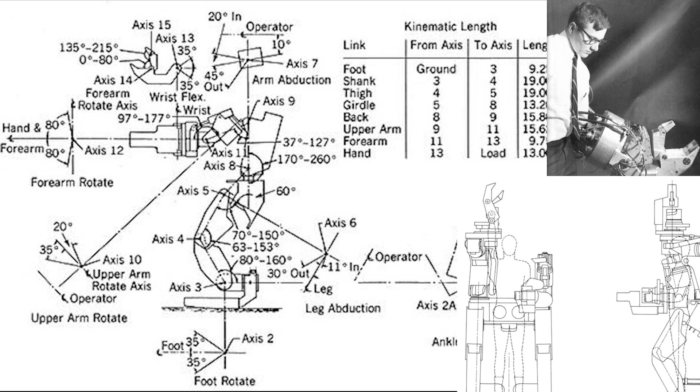I have been away at an event to do with exoskeletons in Washington DC. This was ErgoX 2023, where I was with people like Bill from the Exoskeleton Chats, through to the head of the HFES, Chris Reid. It was all about exoskeletons and the human factor side. It's been quite the adventure, really insightful, meeting people who are also interested in finding Hardiman and figuring out what happened to it.

Let's get right back to the mission at hand. It's now official, there is a date. The 7th of December is when we will be unveiling the build of what we've actually been working on here. This is for an event I'm doing at UCLan. I'm doing it hybrid, so I'll be giving a public talk about exoskeletons and having some guest speakers interfacing across the pond. It's all really exciting. This channel is going to change a little bit, because we're now going to have a report each week about where we're up to with development on the actual project, where it's going, and whether we're ready for the event. Starting from today, the 28th of the 10th, we're going to be counting down right through to the 7th of the 12th, which is when the event will occur.

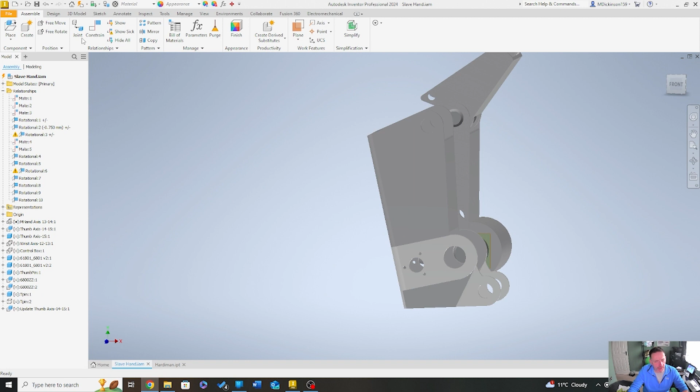However, what we then did is I went back and changed it. Let's just hide you out. I changed the original one to match the actual one that we've now proposed to be correct. This was purely because, if we have a quick reminder on Mosher's image here, you can see there is a 3-pinned plate here which binds into the back, which I believe to be for the actuator, for the hydraulic actuator. So without further ado, it's time to make a couple of changes, get this swapped out and put the right one in.

So I'm just going to bring the hand back, and we're going to get rid of that. Let's get you, and sadly hit delete. Watch the whole system go, well, what have you done, you've broken stuff. So let's put you there. Are you still in? Oh, you're still good.

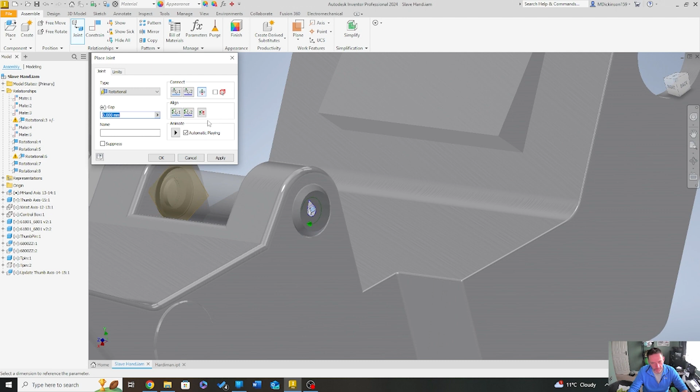So let's get a joint. We've done this so many times now, I can move relatively quick. So joint you... oh, hang on, I'll joint you to you. Yes, spin that round, there we go. And then apply. Oh yeah, let's just add that to the relationship.

Same again, let's do a joint, let's go you to you. However, I'm going to apply a gap here of 0.5 millimeters. Make sure that's right, it's going the wrong way, so minus 0.5. Perfect, so I'll go apply, add to relationship.

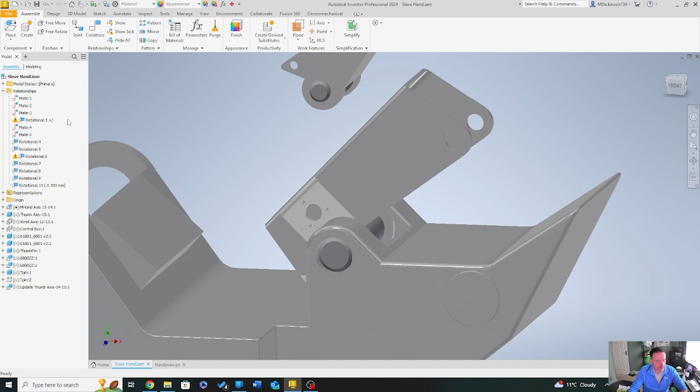It's just because there's been changes and the system's like, oh no, what are you doing to me? So on this one here to this here, I've lost some of my restriction we had on it. I do actually have to build that back in, which is a pain in the backside. So anyone that's erroring now, really I've got to delete it, and delete that as well, or else it's going to start not playing ball.

So what I'm going to do is just get things into position, and let's do the same again. I'm going to go joint, of you, and I'd like to place you onto here. Snap that into spot like that. Apply. Okay, and oh, the other one hidden, I'll get to that in just a moment.

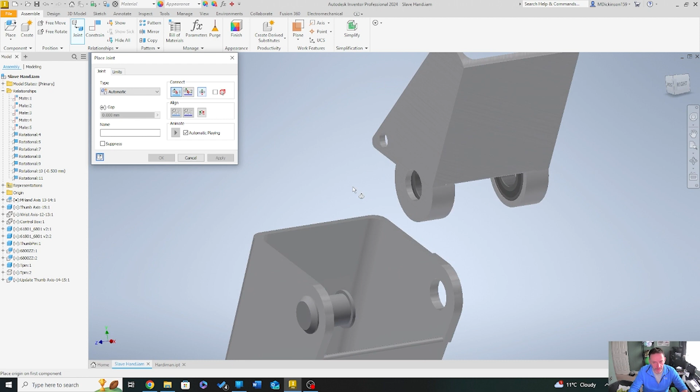So I'm going to say I want this joint and this area to be snapped. And then, as ever, it'll ask, is that what you want? Of course it is. So I'll go 0.5, because I think 0.5 is what we chose, probably about 0.75 looking at these, but whatever. So I'll click something like that.

A couple of bits we need to fix. It's not a major issue, but there is stuff we need to fix. So let's bring that round, snap you around to there, and we're at something like that.

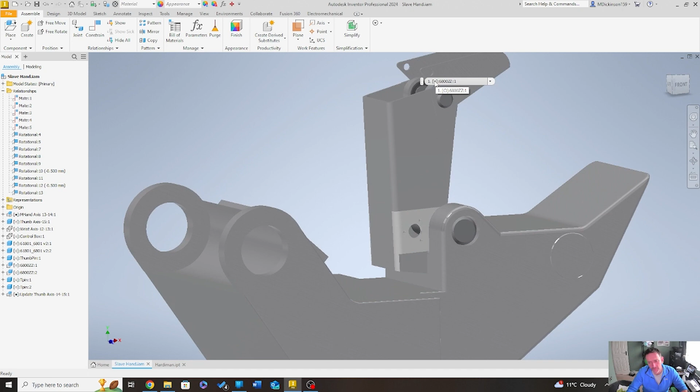So what we've now got is, if we have to take a dive down deep here, we've got the actual pinpoint. These pinpoints here, I am 99.9% sure there is a linkage here. If I was building this and I was in the 60s, I would probably try and have an interlinkage here, but just the way that this is put together tells me that they probably didn't, which I'm not criticizing, but...

I don't know, I'm not convinced with that. I'd have really done it so that it was an interlinkage, because do you really want to be able to independently control the tip? Just the tip? That's a joke, but never mind.

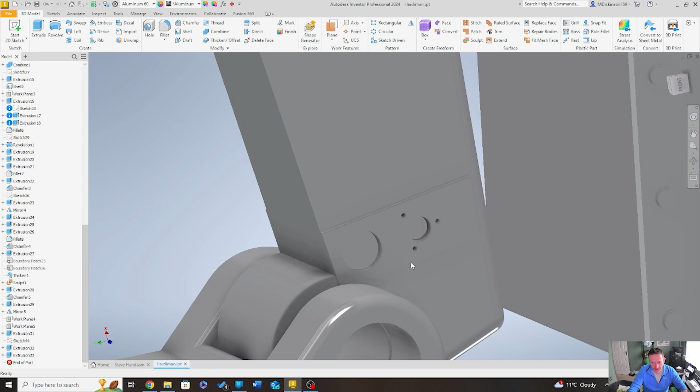Anyway, okay, so let's get back to it. I'm going to flip this back around to the Hardiman itself. Now you see now that really our initial design here has now died a death, because this is how I'd originally designed it in, and that is how it actually has gone.

Now, to just rest assured on your faith in me, let me just come back, push this to here, let's bring this back to Mosher. And you can see there, that's where that plate is sitting. To be realistic, it looks like there is a countersink sitting there, which I can add in anyway, so I'm not too fussed with that.

Okay, so we're that little bit step closer now. Now, next thing we need to consider, just zoom it in. Look here, look to the lower end. That section there is cut out. One thing we know for sure is the whole thing, lower arm here, is hollow.

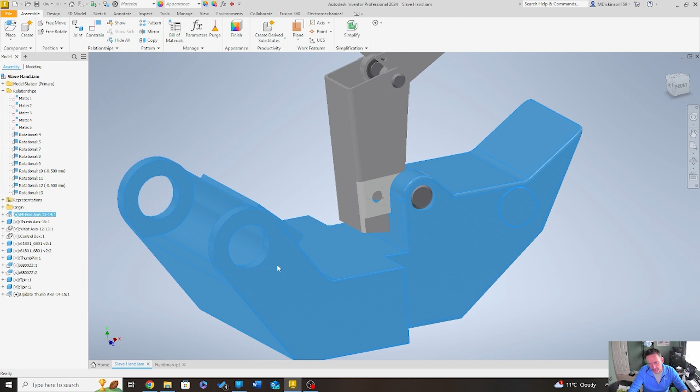If that to be the case, that means I'm going to open this up, flip you right round, and then let's take a look at this being hollow. So we've got chamfer, what's it, chamfered there? That's chamfered on the outside.

I'm just going to suppress that because I don't think that's a feature that's needed. And we're going to thicken there, suppress you as well. I don't think that's needed, but we'll leave it. That was from the counter things that we were doing.

Okay, so what I'm going to do is presume that there's, I'm going to go 3 millimeters. That is me guessing. They wouldn't have wanted this thing to weigh a ton. You know, we kind of sit there and go, why have we got 6 bodies?

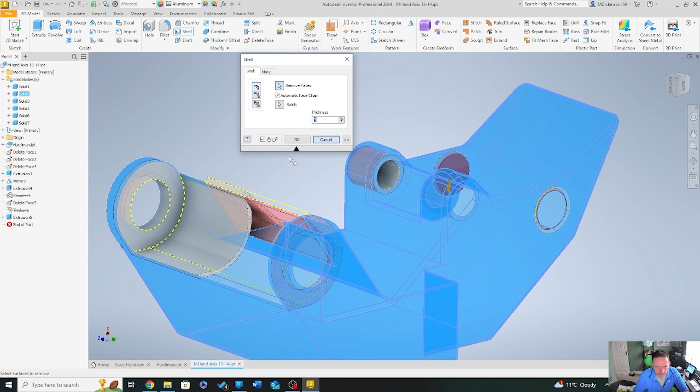Okay, let's try this one more. There's a shelled section there, and okay, so...

I see an error here. That makes me wonder, is that what's causing the problem? So if that's the case, what I'm going to do is quickly make some modifications, chop that out, because I am actually going to have to chop that out anyway, because I realised something on the construction that needs to be thought about.

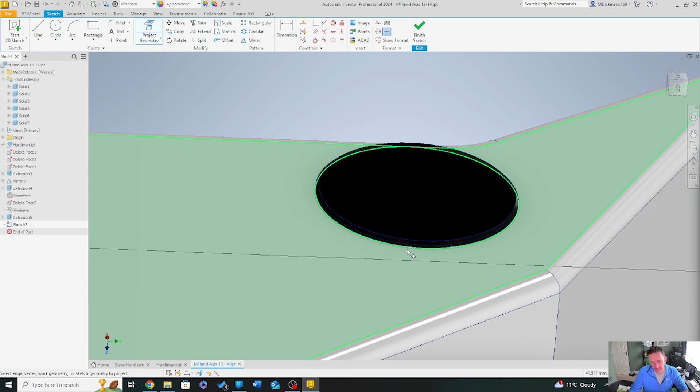But I think shelling something like this is a bit of a pain in the backside, which, you know, any system like that, it's not an Inventor thing, it's just any system. When you do something which is kind of crazy in the values, the system is not always happy.

So what I'm going to do here is I'm going to use the same sketch to do it on both. Great tool this, I love this. So profile, I've got my profile set. Where am I taking it from? Here. And I'm going to flip my direction, turn it to a cut, and bang. So now what I've got is a shared sketch between 2 profiles.

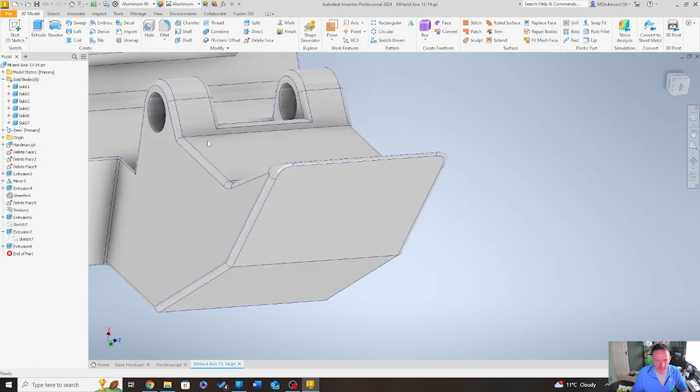Great tool, love it. I think that is one of the first things that are causing problems, and probably that. So what I'll see if I can do is, just an experiment, I'm probably going to cut off this section here and see if that will shell, because I don't see why the rest of this wouldn't shell on a 3mm rad.

I see an error there. I've got an error marker there. I wonder what that was from. Let's just come back. Let's go shell. We'll go solid U.

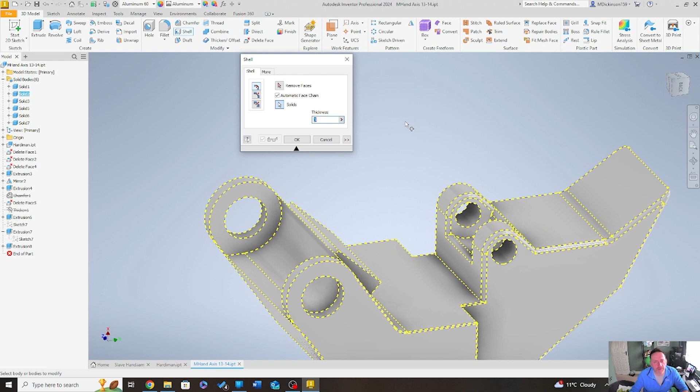Let's see if that gives me any joy. Come on, come on, come on. I think it's this back end. Oh, hello. Okay, so let's just have a quick look.

It appears that my suspicions could have been correct, which is often nice to be correct. Let's get a section in here. Pop you right out to there, and there we go. Perfect, so we've now got our shell section. It's all nicely into position.

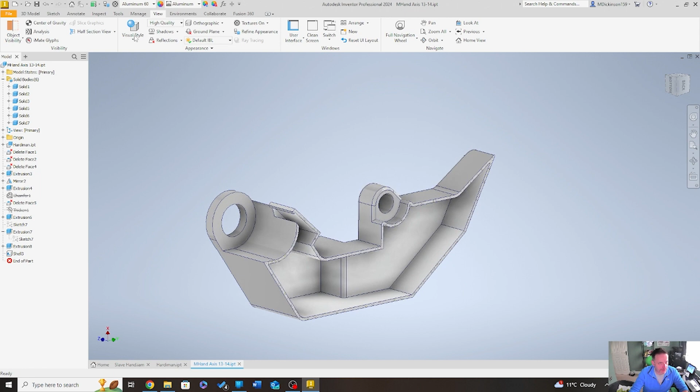Now what we need to do - this was coming just because of that small interruption which was coming from the locator pin that I'd put in. So I'm going to delete that out. I'm going to come in from my midsection here across and cut directly down.

Wait a second, let's have a quick look. See there where the rivet comes in, and where over the chamfer sits, that's what they've cut back. So I'm going to go mid direction here, and then it goes right up to the midpoint of where that anchor sits, so here. So I'm going to cut that right back.

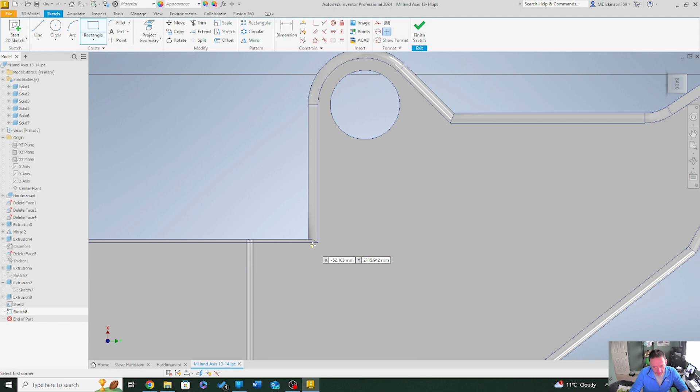So here we go, let's see if this works, because if this works, it's so exciting, isn't it? So let's go here, go right plane, and then let's do a quick sketch. I'm going to bring in my corner rectangles, snap to you, and then over to you like that.

Okay, and then like magic, we get the thing into position. Rather than you guys having to sit there watching me do millions and millions of sketches, I am just pausing a few things out to make life so much quicker. So let me quickly bring this back.

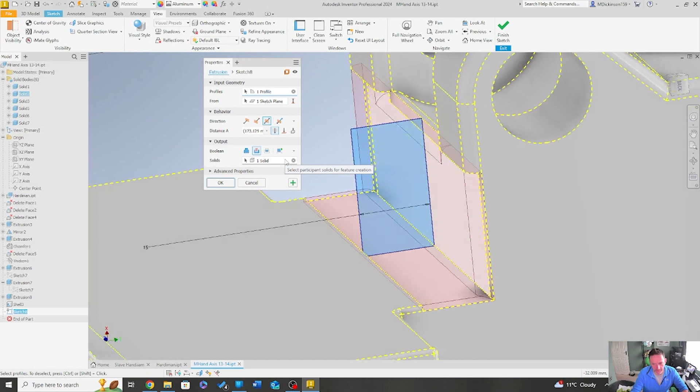Let's go to view, let's go realistic for this case. We're actually not doing solid, so we're doing cutout, and this is going to go through all on both sides. If you look there, that's what we get. Now this is where we're going to have to do a bit of mod.

Okay, I suspect this section here needs to be cut out a little bit more, but the problem is this lower section here, and I've only just thought about it now. So if I quickly come to here and go to edit sketch, snap over the top, and then let's just go to view so I can see what's going on.

You get down to here, and if you look at that section there today, that is 3mm. So in other words, my relation here is too short. So what I need to do is get on a sketch. I'll do a project geometry view, and I'll make sure that's turned to construction, or else I don't want to get mixed up in dimensions of the wrong kind, so to speak.

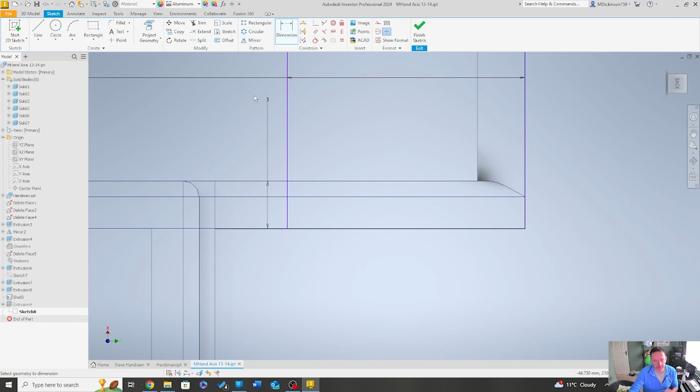So that is down as 1. That's actually not - it needs to be 3mm to capture that full cut through. So if I then confirm that, it should take that section out completely. And now the only thing I'm really curious about here is if you look at that section...

Is it a true? I mean, for me that's very close. It actually shows how my rad is not enough on this section here, but that can be changed, and so I'm not too fussed with that one. Let's bring it back, go to realistic, and we're back there again, and you can see it's this rad. This rad's a little bit short, but as far as a piece goes, that's a good move forwards.

So let's have a quick save on that. You sure you want to save? Yeah, I do. And then I'm going to quickly jump back to the slave hand piece.

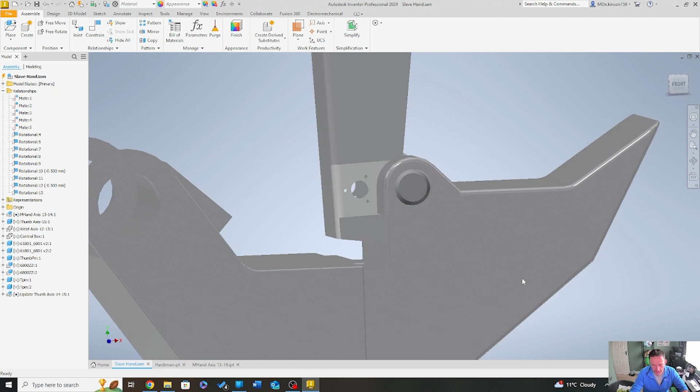Okay, so really what I want to do now is bring in line definition, just because it gets a little bit tricky to see exactly what you're meant to be looking at. Now the reason I've got that there is because - let's just unground you - is because if I bring that back, you can see there that this will have been anchored.

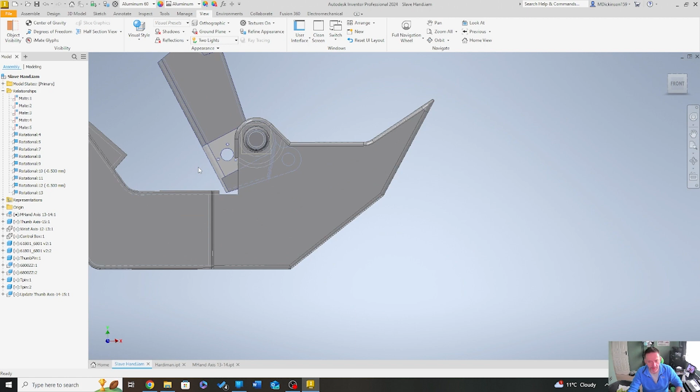Yeah, it spins round. Now what we can clearly see here is even this cut that I have, we could actually probably give some more space there. It's a big sectional cut out there, so we could probably bring it in a little bit, because you see the maximum extension sits just there, so we could probably bring it in.

But the question is what is that width in itself? So let's have a quick check. I'll go this edge to this edge, and you see there, 3 millimeters. So one thing that can be quite common in CAD is people will look and kind of go, that's massive, but when you actually look, you kind of go, that's actually quite small, it's quite tiny.

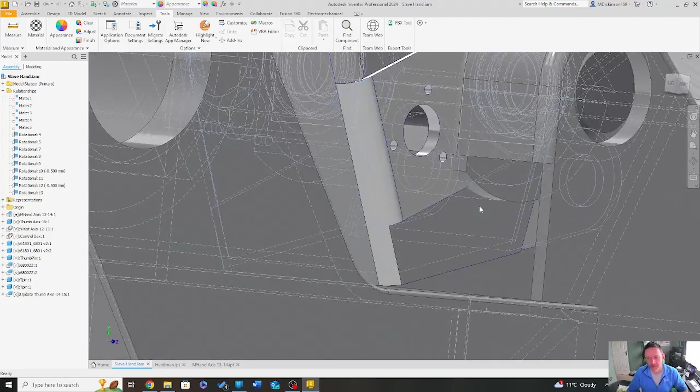Let's not push this look too much, let's take it a bit more straightforward. Now the other interesting thing here is, look there - I don't know how well everyone can see this, but if I click here, I wonder if I can split that in half. That doesn't look right to me, that's my point. Let's go into a half sectional view, push it right up to there, like that, and click OK.

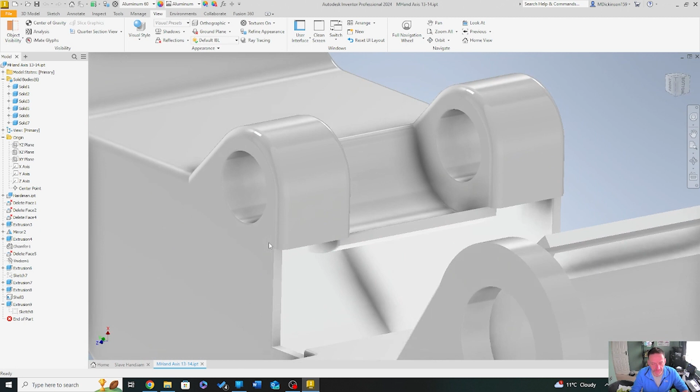See? Do you know what that means? That means the original scoop sitting there in the design itself still needs cutting out. Let's get back again. So this section here is proving itself to not be what is needed, so in fact this is now actually anchored over. I think we're going to have to take a very smart approach here, or else we'll end up very sticky in a difficult situation.

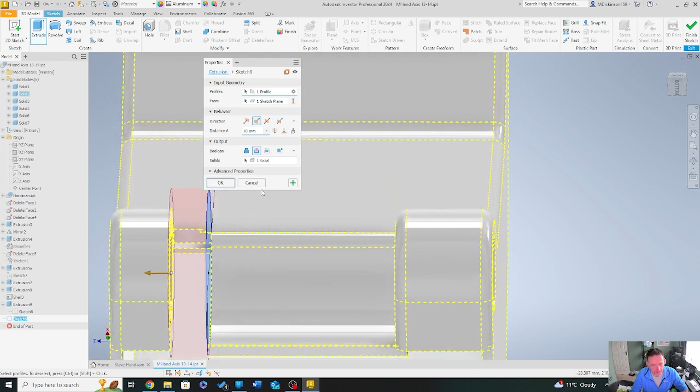So what I'll do is come across and do a sketch. In essence I'm going to cut out this lower section, and this detail aspect we're going for now is to make sure that when this is made - because let's not forget, this thing is being made, we are going to build this - we want to minimize the level of failures that appear, because we're trying to pay homage to the overall design.

There's an extra section I want to talk about at the end of this video, which covers some other things that were going on in the 60s, which I really need to take into consideration, because I've given an awful lot of acknowledgement to the Hardiman program as well.

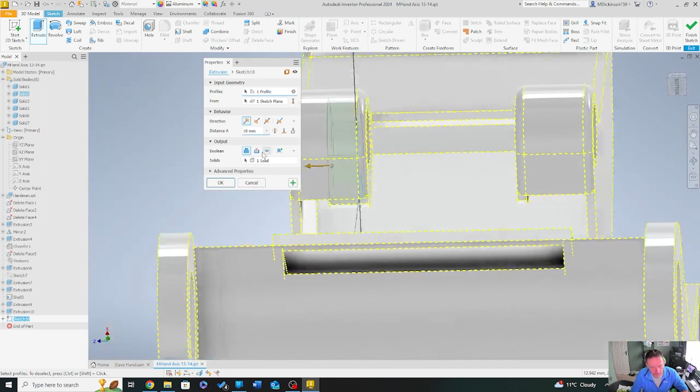Okay, so I'm going to place a sketch. The reason I'm doing this is I intend to print, and there's a large material weighing on these thumbs. So what I'm going to do is extrude that section, going right to here - that'll do it, that's right - up to there, just to give it that sturdy section. So if we look now...

Yeah, my mouse stopped working. I was like, what's going on? Look now, we got that there. We're going to have to pluck it out in just a second anyway to have a quick look to make sure it's correct. Again, let's share that profile.

So I'll do an extrude, doing it on that face again, but this time let's take it from the other side. I'm going to do a profile from this face, flip that direction, go to the end face, and click OK. So now what we've got is dual point to each side - it makes life mega easy.

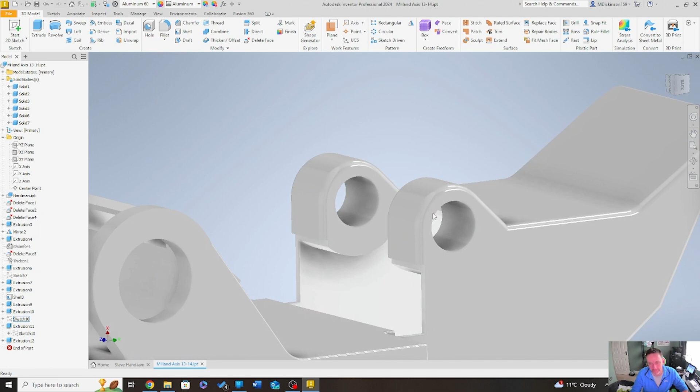Now there's a few things instantly causing problems. We need to make sure bearings can fit, which I don't think will be a problem, because I'm sure we can fit some interference bearings there anyway, so I'm not too stressed with that. But let's just save that - it's going to ask, do you want to? Hell yeah, I do. I'm going to pop you back.

So let's hide that off for a second. Yes, oh fine, let's just go back to delete section. There we go, okay, so let's put it in.

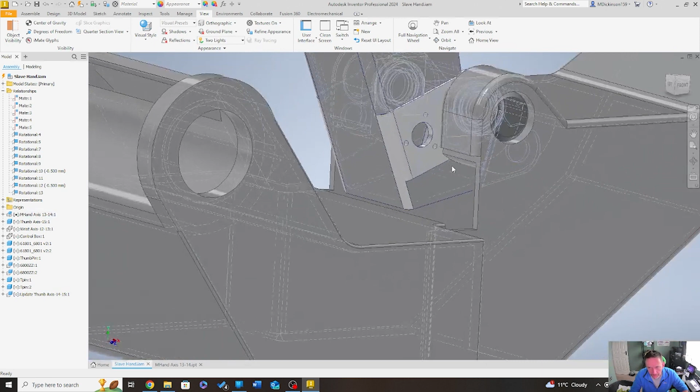Okay, so we've got the full - it's got a full sectional element now that it can actually move around. Quickly pay homage to the actual design, exactly the same. I think there's a large fillet across here that I've not added, which I think needs adding, but let's just take that as we come.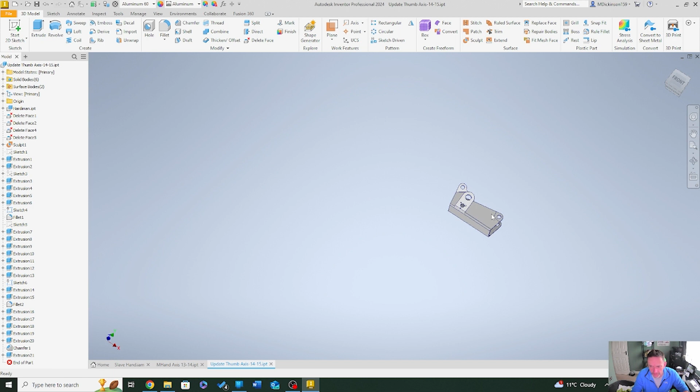Okay, right, so we've got onto there, and we're now - what I think I'll just quickly do is bring in the new thumb, because this is what I called the new thumb, which sounds daft to say, but it is. I bring it into here, and you see this square section here.

Based on the actual original, we've got a rounded edge there. I'm just going to round that edge in. The only thing I don't like is if you actually look at the original design, that edge isn't rounded - it doesn't seem to look rounded. But I'm going to put it on there because I think fillets will actually do a better job.

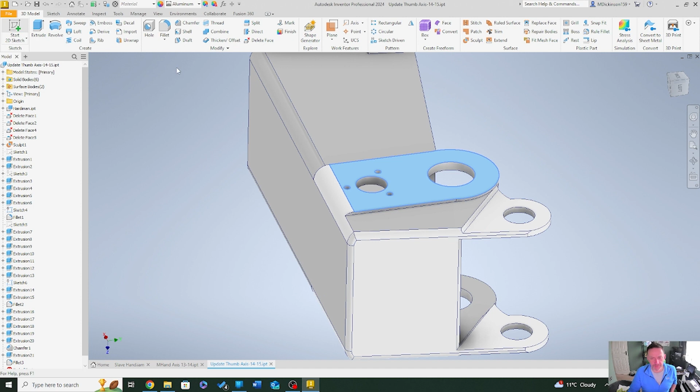And if we just pop round, you can see what I've done - this is a far more sophisticated structure now. Based on the image we've got here as well, we've got that countersink plate. What I'll quickly do, because I've got to do it whilst I'm here, let's just get it on there, get it done.

I'm going to place my sketch onto here, and then let's just pan it right up to the edge like that. It's probably not as accurate as I'd like it to be. And put you to there. Counter cut to direction - let's go by 1mm, because I think it's only going to be little.

It's a cover in essence. So I've got OK, OK, and then we have a countersink there. So let's just flip that on the other side. Again, let's use that technique - the technique that I love, and believe me, by the end of us using this so much, you guys will love it too. So profile section, I'm going to take it from here. I'm going to flip that area and then cut it out, and boom, we're done. That's it.

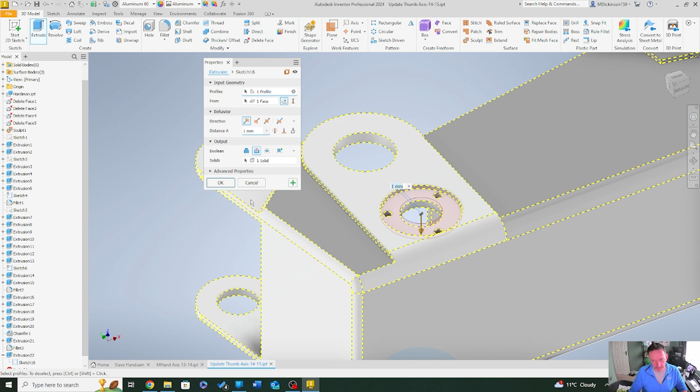And there we go. So we now got this countersink. We can pop that in, and that's then ready to be set. The countersink plate is that, but it's actually a plate that you're going to push in, which I'm not too fussed about. So that's just fab. Okay, so let's get that back, and now let's close you out.

Right, and finally, what I'd like to do - oh yeah, there we go. So the bearings are in there. So now what I'd like to do is go back to the main hand. So we're going to give it a hand.

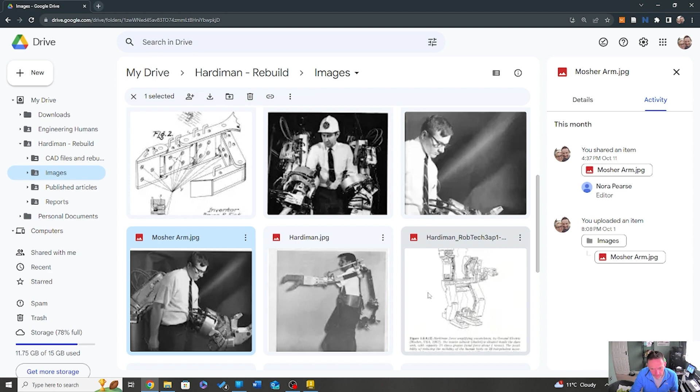Let's have a look. What about the U? Is this one? So you look on that as well. It's there as well, so there is some type of a sectional cut there. I mean, this might be me just being hopeful, but I don't know.

So the video, this is from the video itself - look there, we have a line. This thing is in two pieces. Okay.

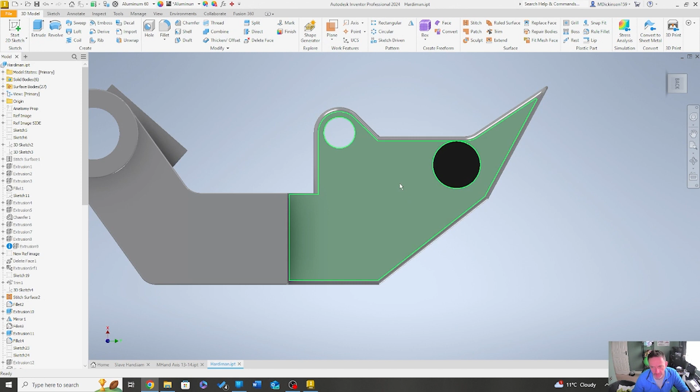So now what I'm going to do is go back to our original major piece, which was the Hardiman single piece section, as this. Flip this over like that. Based on this, let's bring this back. It's midpoint to here, and then just under the knuckle. Okay, so it's midpoint to here, and then just under the knuckle.

Okay, so I'm going to come to here. I'm going to do a sketch. Oh, excuse me. And then I'm going to do - I'm actually going to do a full rectangle like this. Okay.

So I'm going to do a midpoint to the end of here. So let's just bring it on a dimension. I'm going to borrow some geometry. So let's do geometry - I just want a point. So I just want that point. Do a measurement from U to U, and I'm going to make that 5 millimeters.

And based on that, I'm going to need to do the same thing here, so I'm going to make that point there to there, and to there. I'm going to make that 20 millimeters.

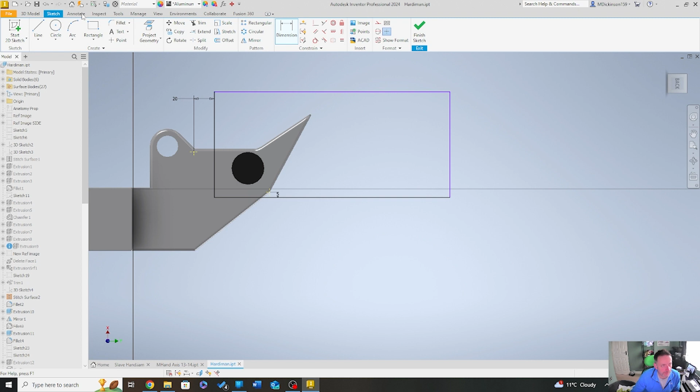Okay, so let's do - I'm going to do a split. This face, this face, this face, and this face. You see there, it's actually the section I'm wanting to look at. So it's the whole thing going through it. What it should do when I click OK is give me piece section down.

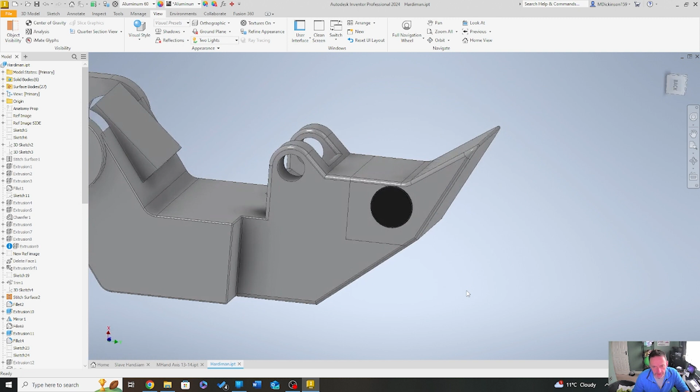So let's just turn this on to aligned perspective view. Let's go aligned - there you go. That's our sectional piece, and that piece right there is the piece I'm talking about, and I think that is cut out. Let's go into the main slave.

Let's do an update. Come on, come on, come on, come on, come on. 3, 2, 1. Okay, so it's got an error, so let's go into where the error's coming from. Oh, there is no error - which I like, I like it when there's no error. We all like no errors, am I right? We all like no errors.

Okay, let's go back into the main hand. So we've got a section piece here. So what I'm now going to do is start - I think I'll cut this section out from here.

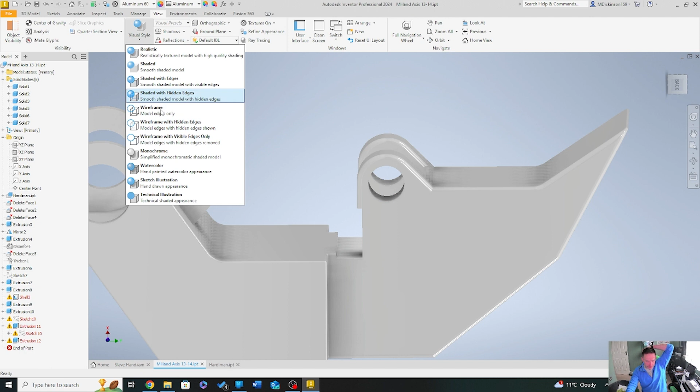And we're going to use that as a window, as a way to decide where that piece sits. And we can ensure that between the two, we've always got a consistent design piece that's actually on there. So I'll come from my right plane and then go sketch and sketch.

And the beauty of this is I don't do anything sophisticated. I'm not going to be like, oh, let's do this, it's really sophisticated, yay. What I'm actually doing here is simply putting on a corner rectangle, ensuring that the piece stays well within outside of the actual unit itself.

Click on extrude. I'm going to cut the whole thing out in one fell swoop. So I'm going to go all the way through all, both continuous directions, and then click OK.

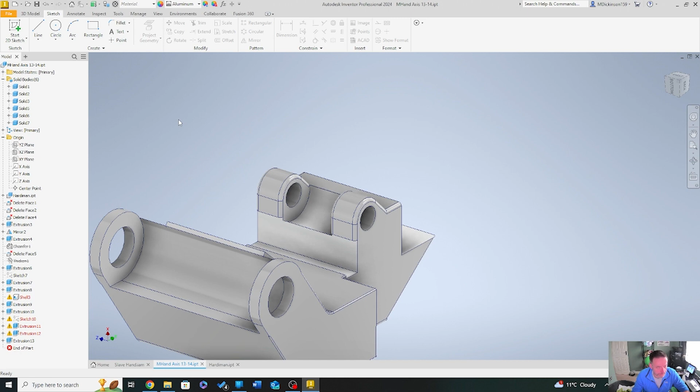Okay, so now what we've actually got is that. Okay, so now what's it unhappy with? Oh my goodness, I've just realised. Right, so I'm having to take it all the way back because what it's actually done now is it's recognised that there's actually split faces, and it's not happy with all the split faces that have now been placed into position, which is a huge pain in the backside.

If this continues, I'm going to have to take a reverse process to be able to do this. So let's try and accept. Is that going to do it? Okay, no, it's not. So I'm just going to delete that.

Now, there is an alternate way of being able to do this, and we will do that. It's going to have to be that way. So I'll delete that, flip back to the original Hardiman. And then on my split here, I'm going to delete that with sketch, save on there. And then if I come back, it's going to say, do you want to update? I do want to update, and it should fix that problem.

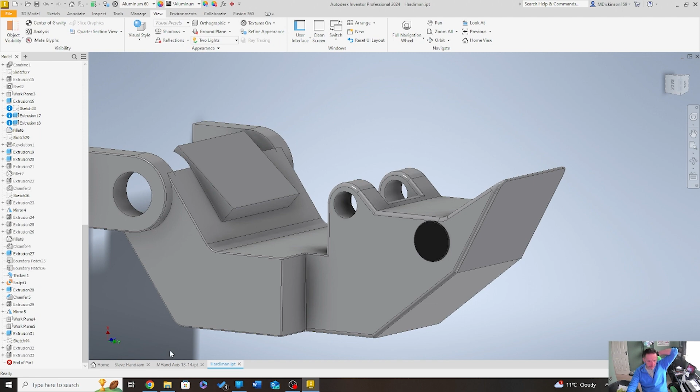As it does, I'll come back here, make sure this is all updated. All fixed. So now, rather than using it as a final piece, I'm going to snap that out. Let's get rid of you completely.

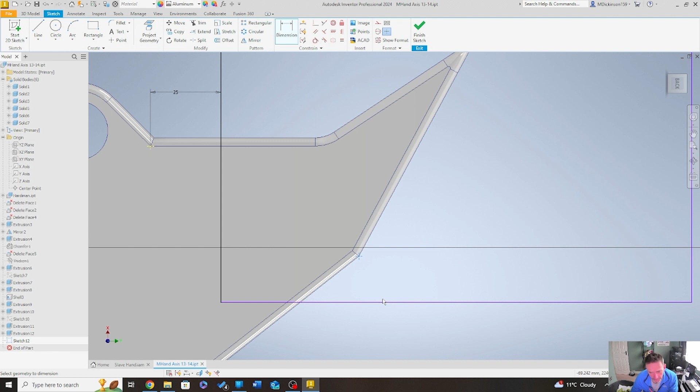And I'm going to put a point on there. Don't forget, these are actually to define what that's going to be. So given the distance across on here, I'm actually eyeballing this to 25, and initially we put a 5mm offset on here, so do 5, and that pushes you to there.

And then what we'll do is extrude on there, so extrude, and we'll do a cut, and then what we're going to do is go all the way through all. And now we have an internal piece.

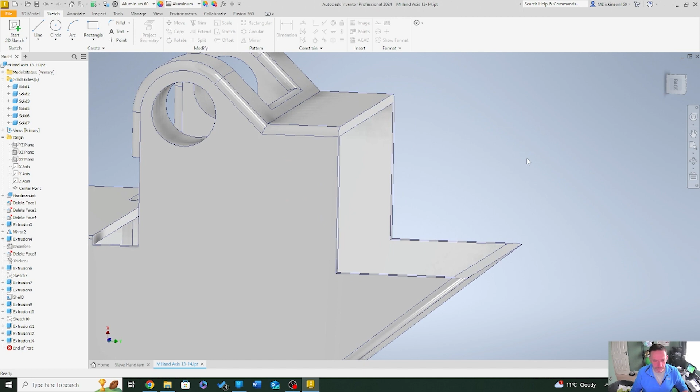Now, I am sure the reason this is there is because you can interface with it. You can get in across it, and what I'm considering is putting some type of gasket interface when you're actually putting these into place. Because the other thing to take in mind is there is a mount hole here. So it makes me wonder, is there some type of wedge or something for it to sit into? But we'll find out. Like a wedge down, so it kind of slides in across, and then there's a damper above as such for you to interface across there.

So what I'm going to do is just get to the other side, get the other side cut out, and then we're cooking with gas. So I'll just click save. Now it realizes that there's been big changes made. Do I want to change things? I do. So let's just turn to there.

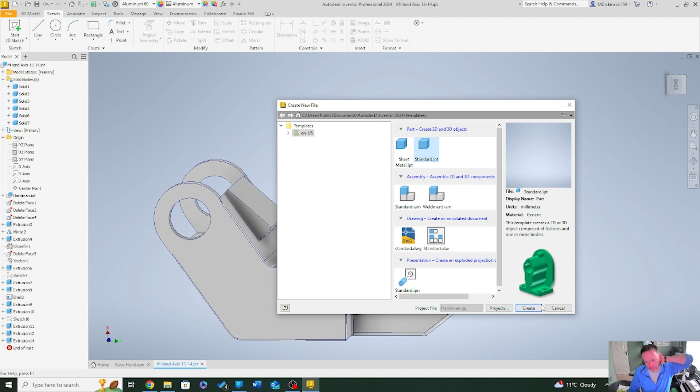I'm going to have to make, if you will, the end of the claw. The claw. So I'm going to go create. We're going to make a new piece. So let's derive tool. Swear to God, how did I ever get by without you?

We need the main. I might as well derive from the hand. No, let's not. If I derive from the hand, it's going to prove to be problematic. So let's not. Let's drop all surfaces. Just solid pieces. I just want that one. That's all I want. I don't want anything else. Let's click OK. And there we go.

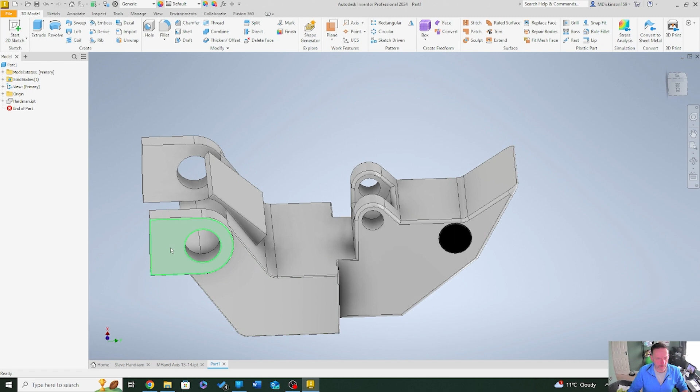It's a solid piece on here. All this back I'm going to cut off anyway, so I'm not too fussed. It's this front section I'm after. So let's go sketch.

I'm going to come across, cut this right down, and then go to there. I'm going to go dimension, come across this piece.

Today's video is going to be a little bit longer just because at the end of this video I actually now want to get into a position where we're going to start looking to prototype and start building.

So, 5. Just flip back, I don't remember what our overall sketch was. It's 5 by 25. So I'm going to go here, come across, and go to you, and go 25.

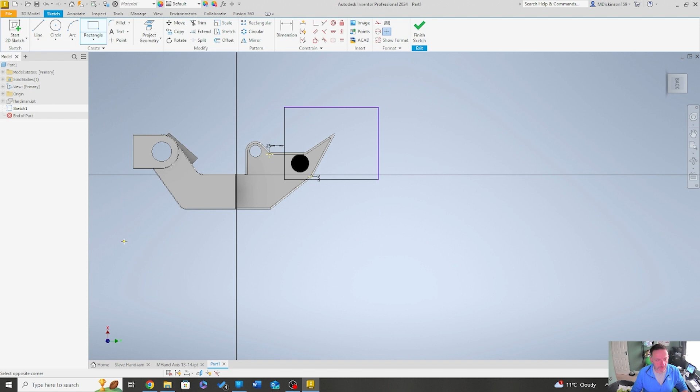Now, you're probably thinking, yeah, but we've not completed the whole piece. That's right, we've not. But what I'm doing is an internal border. So I get that piece where that's going to be, but I'm actually going to use this section here as my cutter. So then I'll do cut through all, and then OK. And now what we've got is here.

Now the only thing that's different is because I've come from the original, I need to shell it. So I don't know if this will work, but let's give it a go. Can't do any harm, can it? Let's do 3mm shelling.

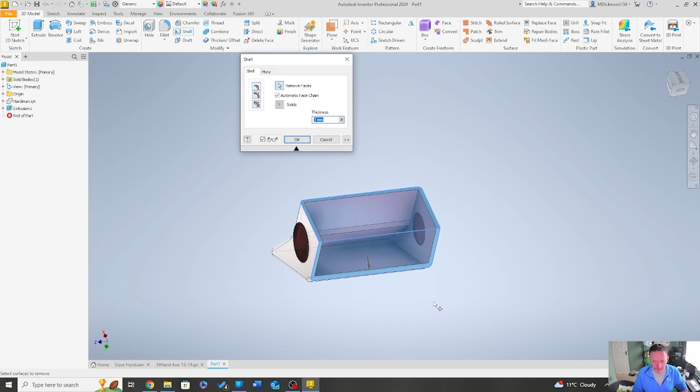So really I am actually removing that face and removing that face. Okay, look at that - on this one it actually did it. Yeah, there you go, it actually did do it. Okay, so we've got this piece on here.

Now, based on what we know about how they did this piece, I'm going to do the same method of approach with our front claw. So I'm just going to quickly save this. I'll save as, I'll call this front claw.

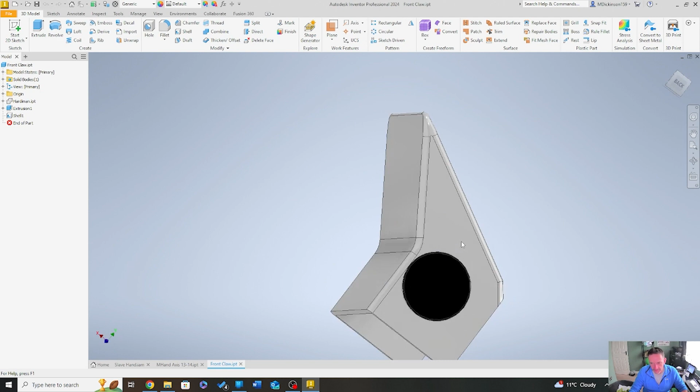And then click save. And based on this actual piece, I'm just going to come onto here and let's think about this first. Okay, I've got an idea. Right, so I'm going to cut into here and sketch.

I'm going to cut this right back, so I'm going to go from here. Come on, you swine, where are you? There you are. Right, so I'm going to use that as a cut. I'm going to go through all the alternate, and one there, like that.

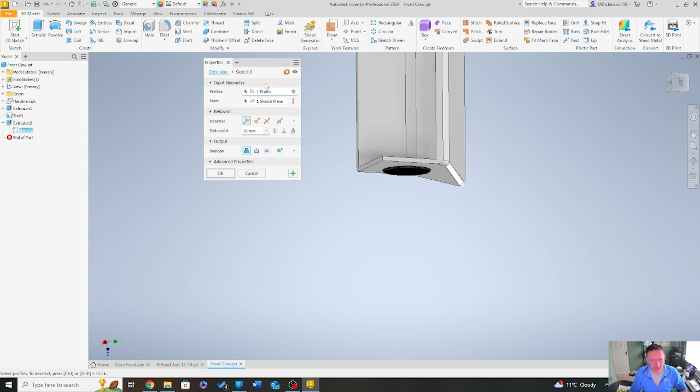And we'll use the same piece again on this sketch. Use that as a shell. This tool, by the way, insane tool, such a good tool. So we'll come across from this face, flip that round, get a removal, and then go OK.

Okay, so what I'd like to do at this point now is use the same sketch again. I'm going to fill this bad boy in, right the way in. So let's just use this as an overall piece. I'm going to go to that face and use that as a sketch on there.

Same again, I'm going to go extrude, and I'm going from what face? I'm going from this face. I'm going to flip it round and then take it to this face here, and then go OK. So now we've got a nice smooth piece to operate with, and we've still got that face actually acting overall.

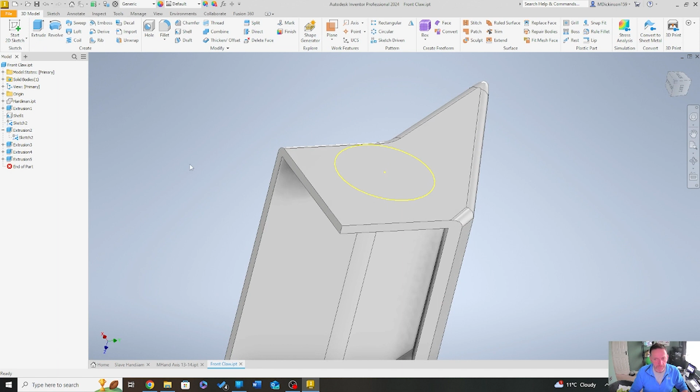Now I'm going to presume that the plate that I actually used on this uses a countersunk plate. So in that process, I'm going to presume that this to be the same size. I know you're probably thinking, presumption is the mother of all, and it really can be, but in this case, screw you, I'm going to actually make this work.

I jest, of course. So I'm going to come back across and then click on there, and then I'm going to do a remove, and I'm going to flip it around and then click on there. So we've now got that, and what I firmly think is that we'll have perhaps, I don't know, let's go

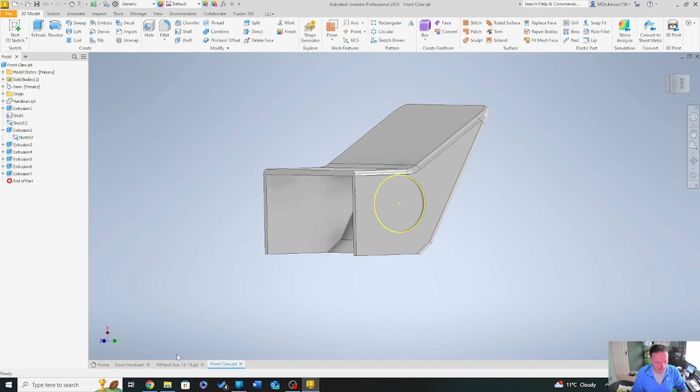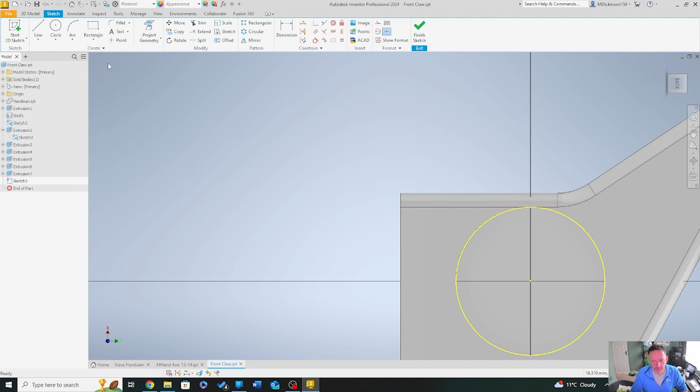I mean, M8s are chunky, so let's have a quick look at the overall size on here. So I'll get on here, let's do a sketch. I'll put 4 on here as an overall piece, and let's do an M8. Let's just set that to a good 8mm, 8mm.

And what I need this to do is to sit in the ideal perspective position of where that is. So I'll take me to there, and then I'm going to ensure that this and this are happy, and then I'm going to set a distance from there to there of let's go 7.

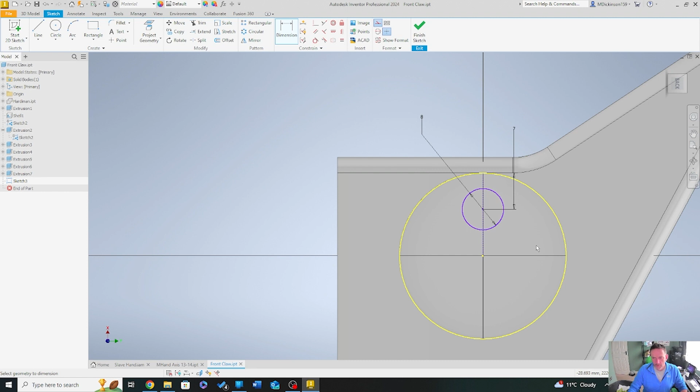Let's bring that down. I mean, that looks freaking huge, doesn't it? There we go, that's a 6mm across. Right, and let's do a circular pattern. Geometry I want to use, and then let's use this as an overall perspective.

Okay, let me come into here, put a center point, and do a construction. Let's try that again - circular pattern, by you and by you, and we're going to put 4 on there. I think 4 is a good shout.

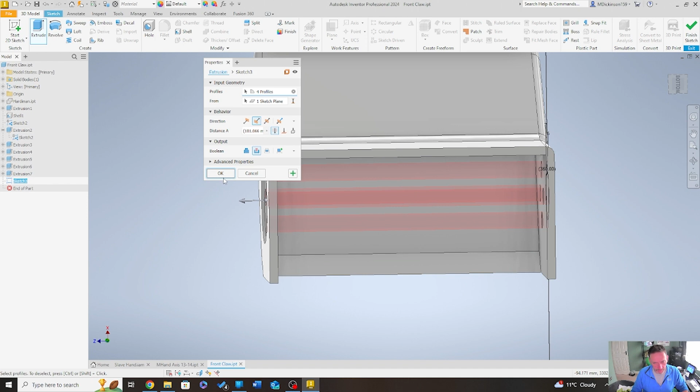Because both sides have been cut, I'm just going to go all the way through, since this is just a whole section to actually get it to interface. So I'm going to do this as a cut, and let's just do an extrusion all the way through.

Let's go through all. Really this would be countersunk to some degree, so I'm going to chamfer this - probably not as aggressive as that. I've got 1. This is my countersink onto there, and what this will allow me to do is simply put this onto here.

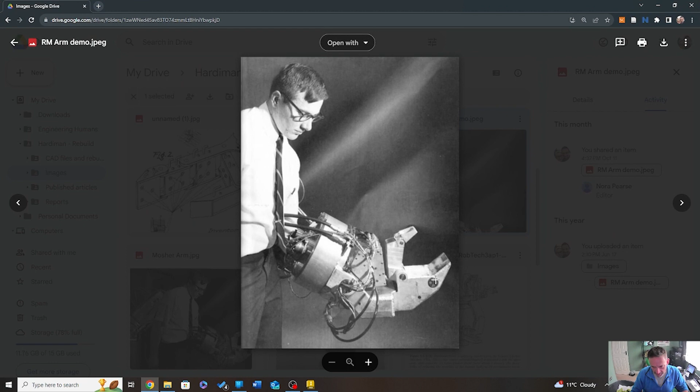I mean, really, would it though? It probably wouldn't, just because we have a faceplate that's going to go over the top, and clearly on that faceplate this actually had those connections on it. It makes me wonder if there was a pin that goes through there, but that's just going to have to be theorized, since there's no real hard evidence to show how that was put together.

Okay, just going to pop back onto the original, click save, and let's do yes. I know it's kind of like, what have you done? You've broken it. Yeah, not kidding. So let's just place it.

Where are we now? And claw to here.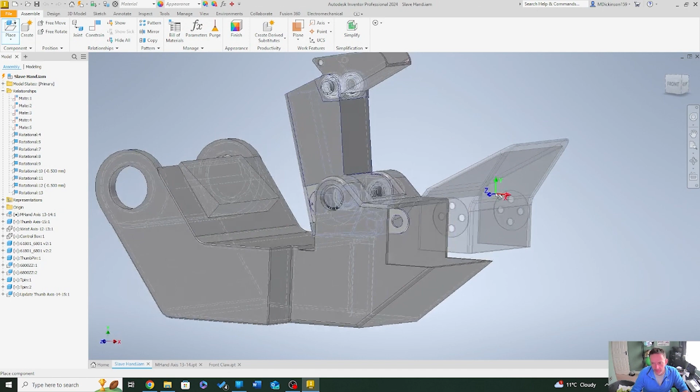Given this, when you bring these in, if you use Inventor's functions to your advantage, I promise it's well worth it. So all I'm doing here is flipping around X, which I've just realized perhaps I shouldn't, because it's not what I wanted to do. So I'll flip it over again - really what I want to do is rotate around Y, and then rotate around Z, and there we go. It just makes life a little easier when getting everything in position, so it's something to keep in mind.

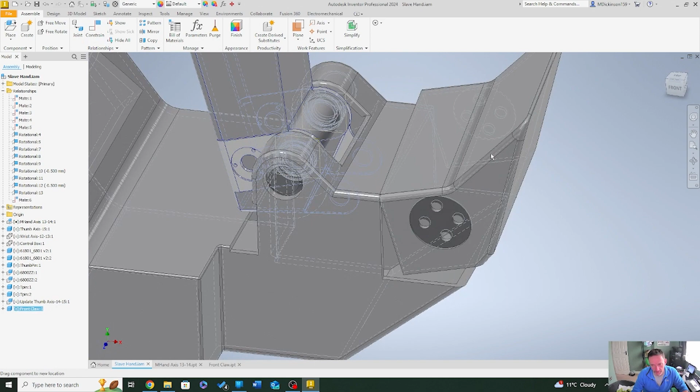There we go, so click apply on there, and if I just pop this out here, you can see how it's actually been wedged. So what I want to do now is just do a final piece on this face and snap it to this face too, and then go that face and snap it to that face, and there we go.

We've now got our Hardiman end piece into position, almost locked, looking correct. What I'm guessing is what we're actually getting here, looking at that, is this is probably an internal wedge.

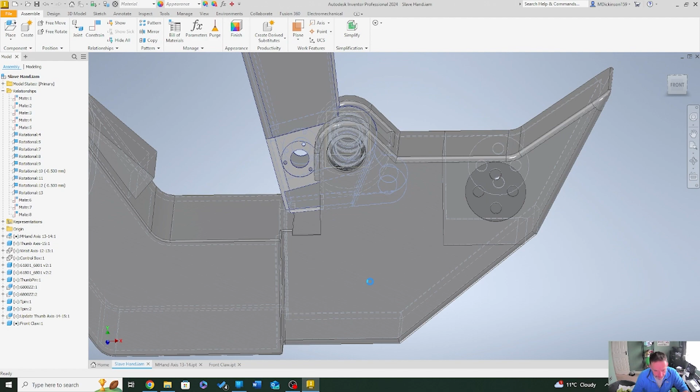So let me just close the claw, save that. Am I on the hand here? I am on the hand. Okay, let me just think.

So I'm guessing it might be easier to do it inside. You may not have done this, so I'm going to close that out completely. Then if I go on this hand, right click, I can go open or edit. If I go edit, I'm actually now in the hand, in the assembly. It is very, very useful.

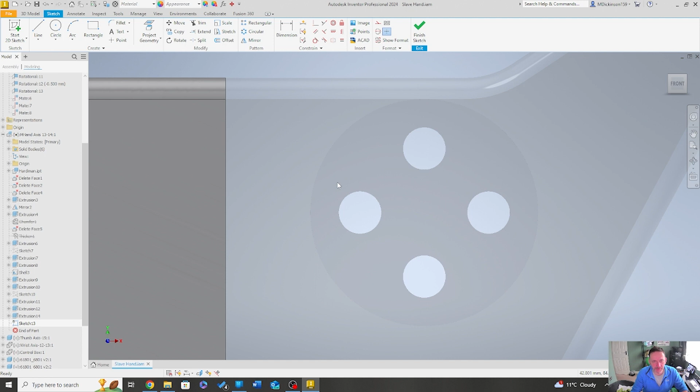So what I'll do now is just go on sketch, and I can do anything I want here, really. I'll come from this point, come across to here, then bring it down to something like here, and then up to there.

So that's still inside, but given that this would be printed, I'm going to offset this by - I'm going to go 0.5 of a mil. No, I'm not, I'm going to go 1 mil.

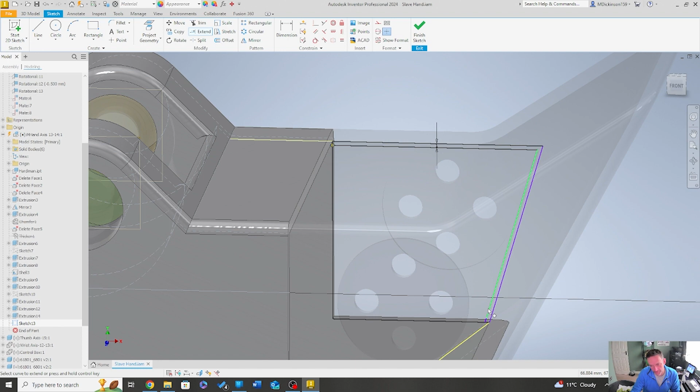Then what I'll do with this is just pop that out there, and I'm also going to pop that out there. And I'm going to use extend - this will extend to the edge on both sides, and now I can use that internal wedge section. So let's give that a go.

Really, to make this work, it needs to have a reason to be connected, so I'm just going to give it some material to grip onto the internal of the actual arm, like that, into there. So we've now got, if you will, a reason for it to be gripping. Let's do an extrude, and this amount - I'm going to go something just gentle, go 5 mil.

I think looking at that overall piece there, that's going to have a fillet just to bring that in. There's no reason for it to be so aggressive on that edge. So bring that into 10 millimeters.

And just ensure that I stay within the mounting plate, which evidently I am.

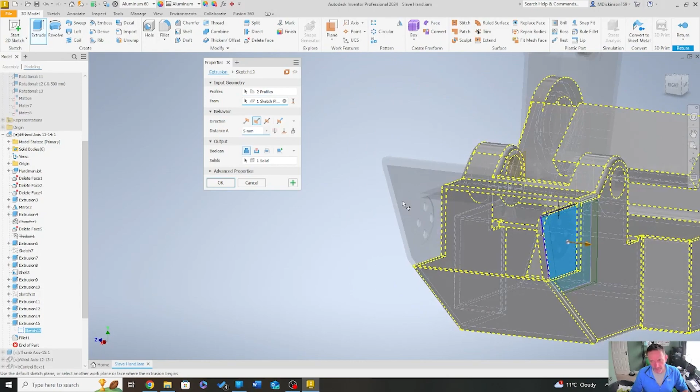Because I like the fillets, because the fillet for me works, I'm going to pop that down, right click on here, go edit feature, and pass it over to there. Now it's just sharing these approaches, just because you see a lot of people who reproduce sketches. Don't reproduce a sketch, don't make your life hard. There's no need to do that.

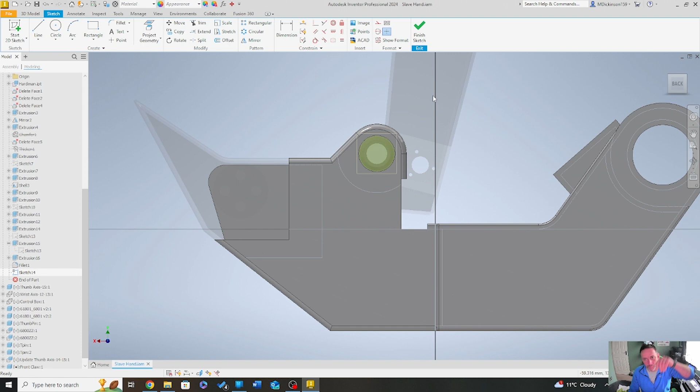So with this now, I'm going to simply look to drill some holes. Let's get a sketch on here. Really, should I have done it in the other? You know what? No, I'm going to do it in the other. I think we should do it in this original sketch. Edit sketch.

So I might be able to share from that sketch, that sketch, that sketch, that sketch. Right, so what I need to do is now pull all these off, just because if I make a move and this is connected, it's going to be painful. It's just not going to work.

So what I'll do is do it on there, and in fact maybe I share from this piece of geometry here, and again I'm just going to make a move on there, and there, and there. Okay, that'll do, to be honest. This one I'm going to turn back to construction, and then let's go. Okay, it's going to error. It didn't error. It's always nice when stuff works, you know.

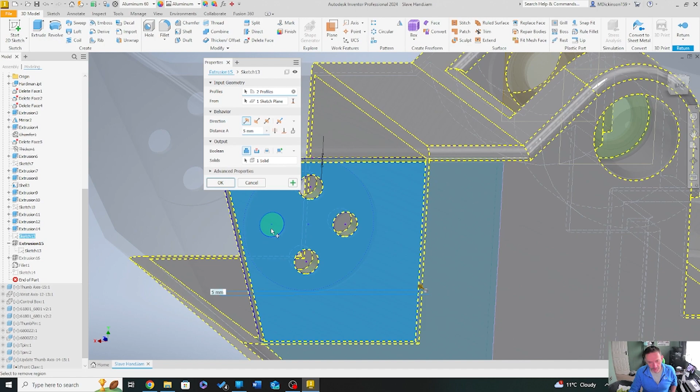So all I need to do now here is just say I don't want these or these or these or these to be considered, and then go OK. And then if I return on that, whoops, is it on both sides? Has it done it on both sides? No, has it?

I don't think I did it, did it? Edit feature. Yeah, 3 profiles, so something captured. Oh no. I'm going to here, edit feature. I don't want that, or that. Okay.

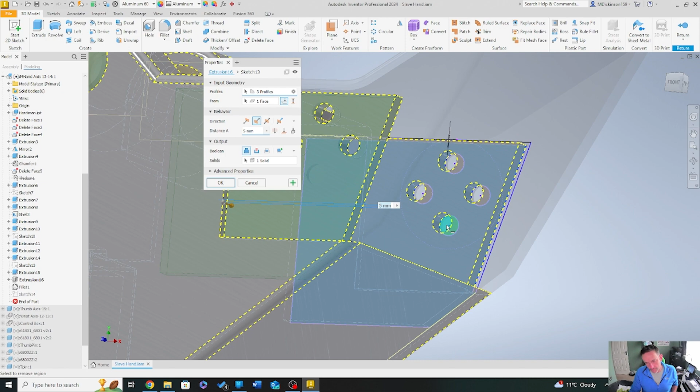And then okay, that should do it. Or am I missing something? I'm probably missing something on me. Oh no, that's done it. Right, so there we go. We've now got that section piece open.

Right everyone, that is the end of this next session. I've actually got this now to a position. What I'll be doing, just a little bit extra, is I'm going to make myself a little end plate to go on there. And that end plate will look exactly like that, as you'd imagine.

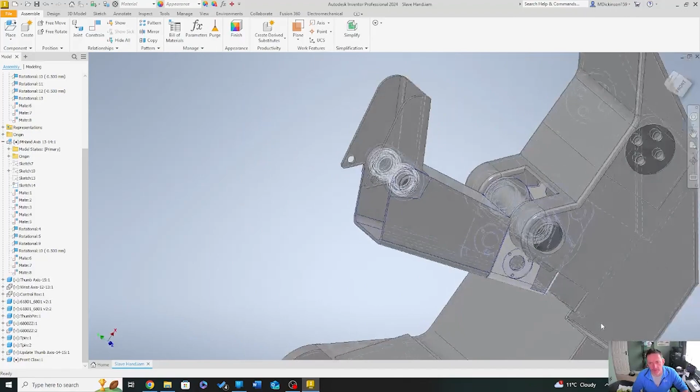And then, yeah, we're at a nice position of where it's about time to start making stuff. Let's see what happens. I can now make the thumb. I can make the end piece of the thumb and start looking at the bearings. I can now start bringing all these key plates together and starting to build there.

And yeah, we will have the world's first. I suppose you call it fan made. I suppose you call it just, I suppose you just call it reconstructed or rebuilt. In this approach though, there has been some changes. We've had to make some changes. We've had to make some intelligent approach towards what we're doing and how we're doing it.

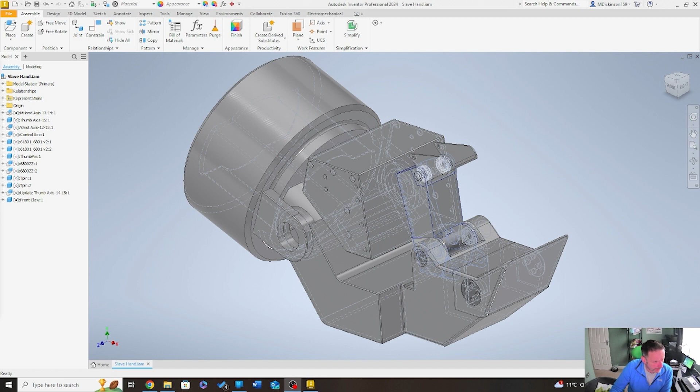This is far from finished. This project is still ongoing. As we're moving forwards, this will now start to become more of a project update of where things are up to. If you are one of my students working on this project, be aware of that. I'll be asking you if you're interested to be recorded or not, just because this is quite exciting. And to get so close to the point of unveiling this little bad boy is going to be fab.

I am going to make some little miniatures, some little custom miniatures of this as well. So if you are interested, do reach out. Just because little miniatures of this, and I have some ideas to turn this into a desktop feature as well.